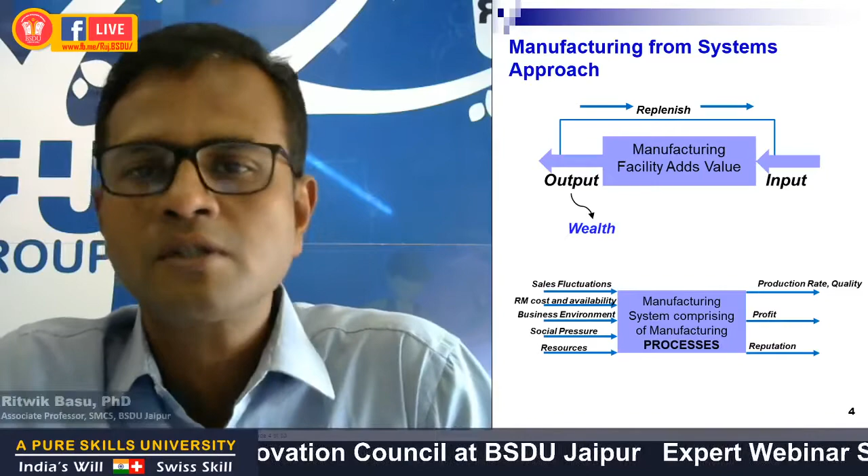Now, when we talk about manufacturing engineering from a systems approach, what is important is that a manufacturing facility exists, and that is really a value adder. As you could see in this figure, there is a manufacturing facility that is adding value to an input material, which in this case could be a raw material that otherwise has no value. But once the value is added, the output generates a lot of wealth, because the output has some value coded in it.

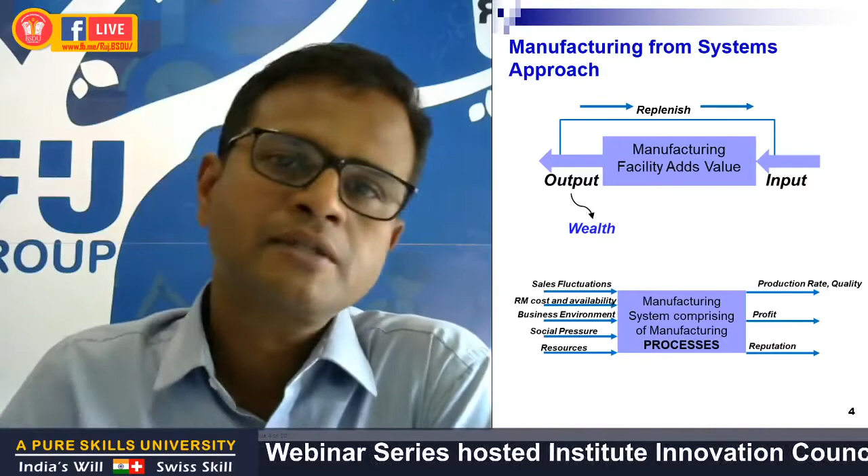Therefore, it is important to plan the facility in a manner so that the value can be added. And if the value can be added in the right manner, then the product can be positioned in the right manner. That is the reason why a manufacturing facility exists. So if I take a manufacturing system that has a manufacturing facility, it really comprises at the heart a set of manufacturing processes that is the key to wealth generation.

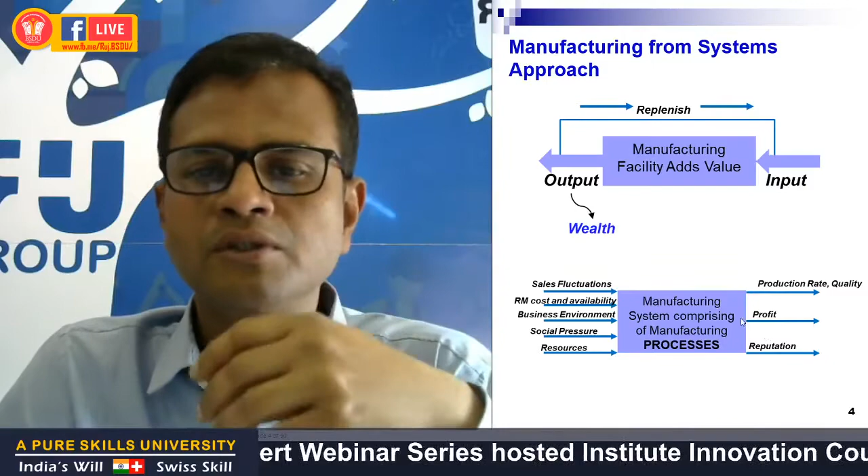On one side, there are various input parameters like sales fluctuations, raw material cost and availability, and the business environment, and on the other side, your production rate and quality, your profit and reputation to keep in business are all important for such a manufacturing system. But nevertheless, such a system will be balanced and work well if the key to it, the manufacturing processes, are well designed and well balanced. Therefore, the processes automatically become the bread and butter for such a manufacturing system.

Now, traditionally, manufacturing industries have brought metals to the forefront of technology, and since then they have remained there, forming the very foundation of our modern society. You could not have imagined a life in which the transportation and communication systems, the buildings, infrastructures, roadways, or even your safety and comfort devices are not part of your daily lives. And you see metals everywhere.

Of course, today many new material candidates have been seen complementing metals and alloys, and composites are one such example. But my feeling is that metals will still comprise the widest spectrum of applications, even for many more years from now.

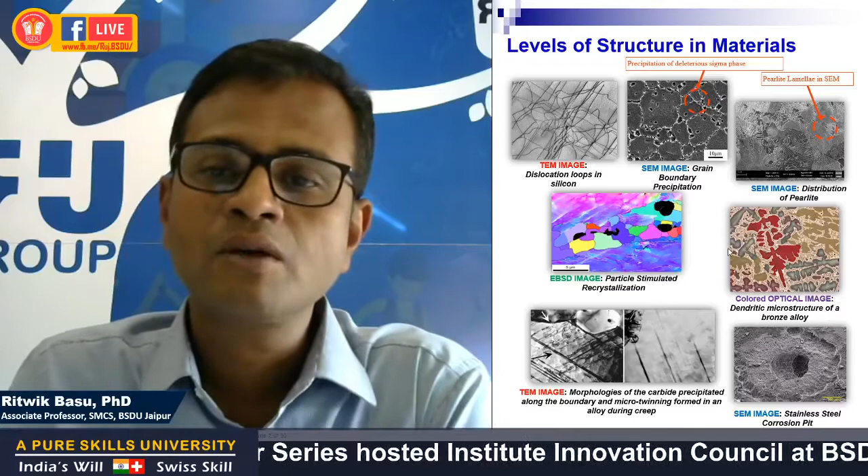This includes understanding the arrangement of dislocations and their interaction in cold-worked specimens, or looking into the distribution of precipitates or secondary phases along the grain boundaries, or understanding the phenomena of recrystallization or recovery during annealing, or looking into the crystallization pattern during solidification of metallic melt through high-end optical microscopy techniques.

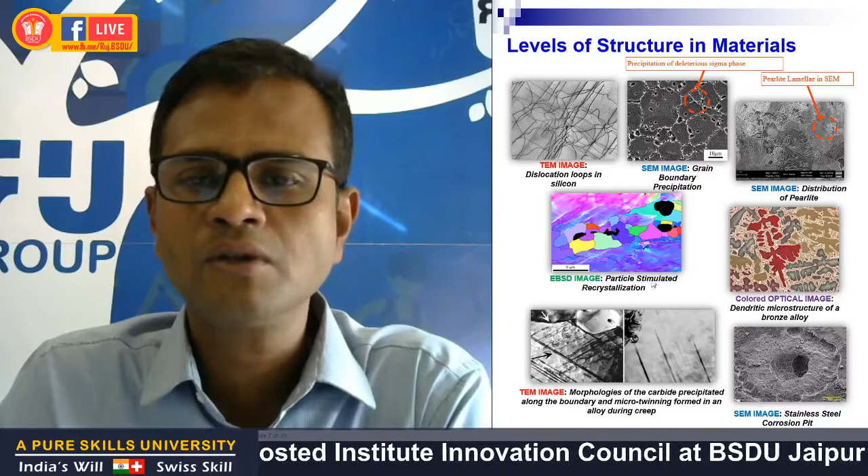These varieties of information could be inferred through techniques such as transmission electron microscopy, scanning electron microscopy, electron backscatter diffraction imaging, or even high-end optical or metallurgical microscopy.

My research is twofold. One, which I already discussed, is understanding the different metallurgical mechanisms associated with different engineering processes, and then inferring or relating the properties of the processed component from a microstructural standpoint. That forms one part, and the other part of my research is...

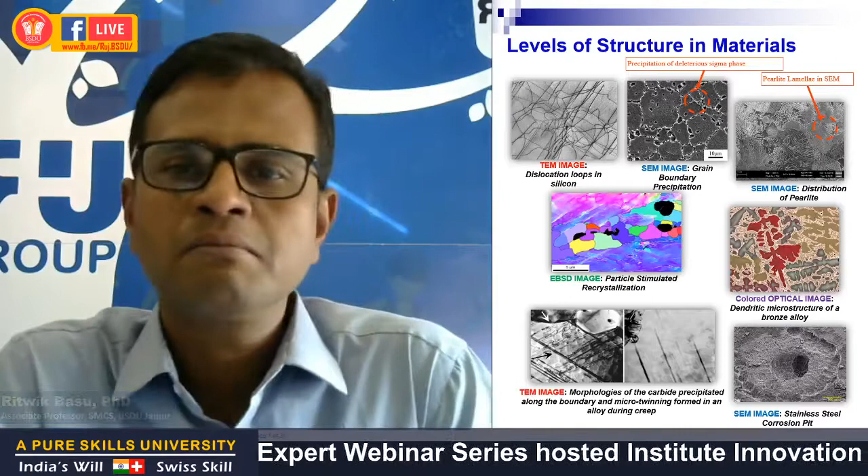...materials characterization or microstructural characterization through high-end scanning electron microscopy techniques, such as electron backscatter diffraction or energy dispersive spectroscopy. X-ray diffraction is another vertical I work on.

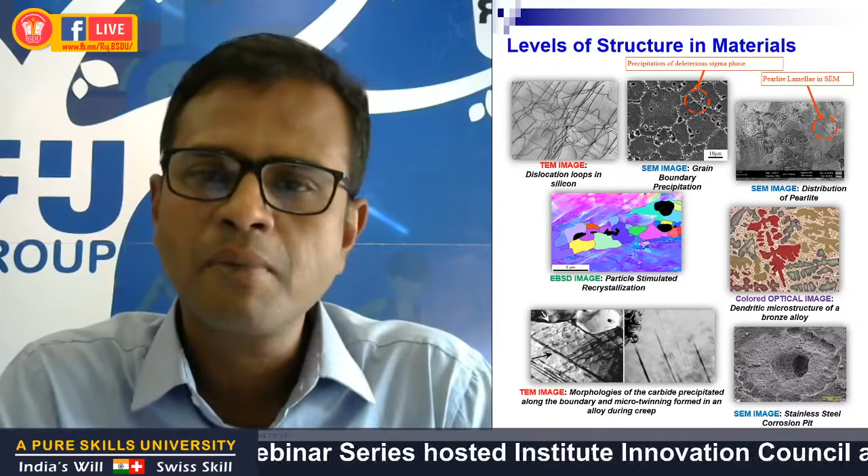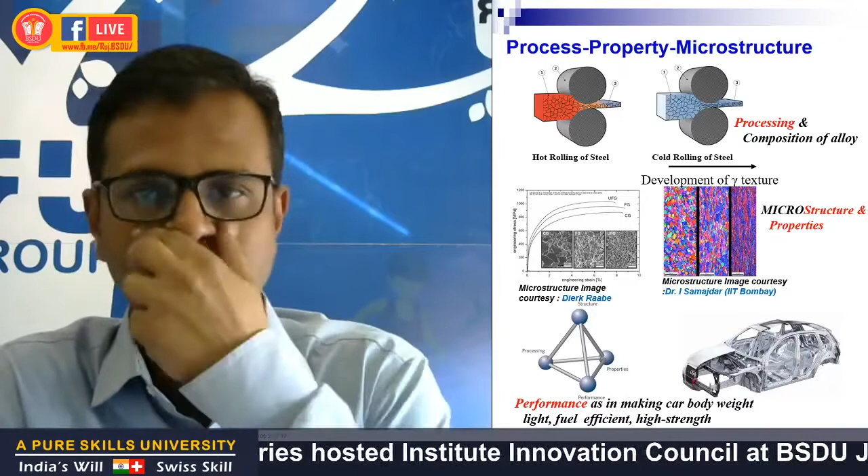Now, to give you a better illustration of this process-property-microstructure relationship in materials, we have this example of car body part manufacturing. As you could see, these car body parts are made up of sheet metals of steel, which are processed through hot rolling and then cold rolling, where a significant thickness reduction occurs.

The obvious question that arises is: the same thickness reduction could have been achieved through a much simpler process, such as sheet casting, which would have been more economic and time-saving. So why do we go for such complex deformation processes? Cold rolling or plastic deformation, apart from obtaining dimensional changes or shape deformation in material, also introduces certain interesting properties which other processes possibly do not offer.

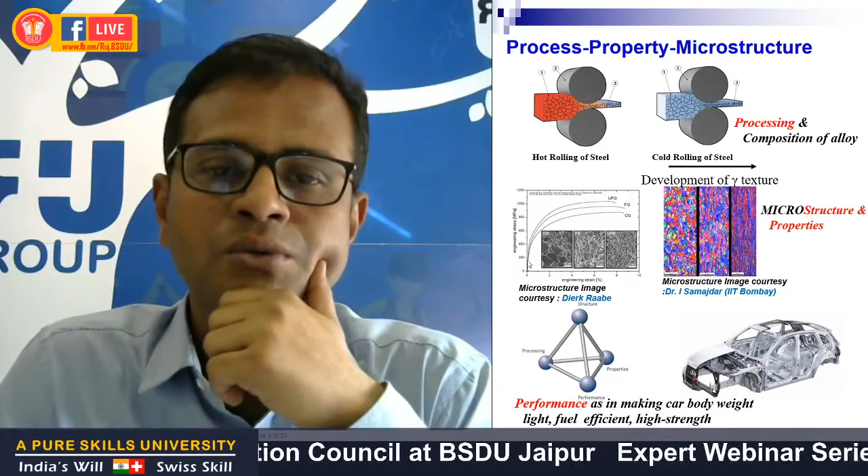Cold rolling or plastic deformation introduces grain refinement and texturing in the microstructure, and that is seen through a significant change in the mechanical properties or mechanical behavior of the materials. So the strength is seen to increase by several times, however the ductility drops.

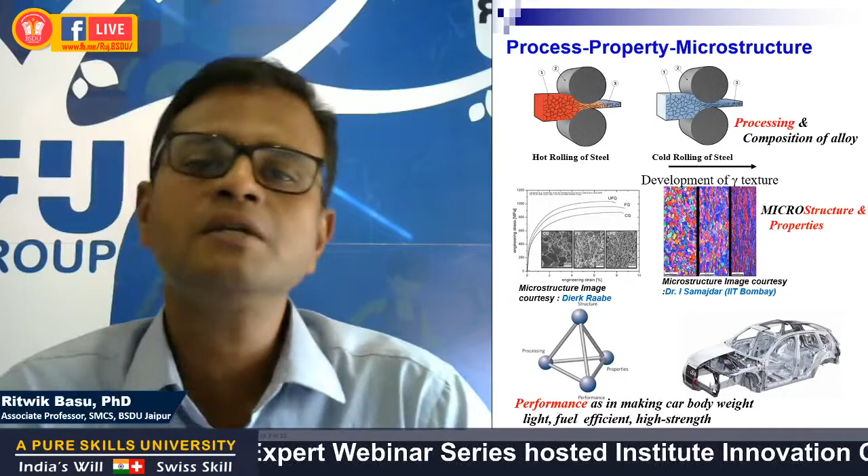Now the problem occurs when you try to give further deformation to these cold rolled sheets to obtain the nice contours and profiles, as you could see in this car body part. Difficulties arise because your sheets have been so much strain hardened that doing any kind of further deformation in subsequent processes may lead to cracking or failure in the sheets.

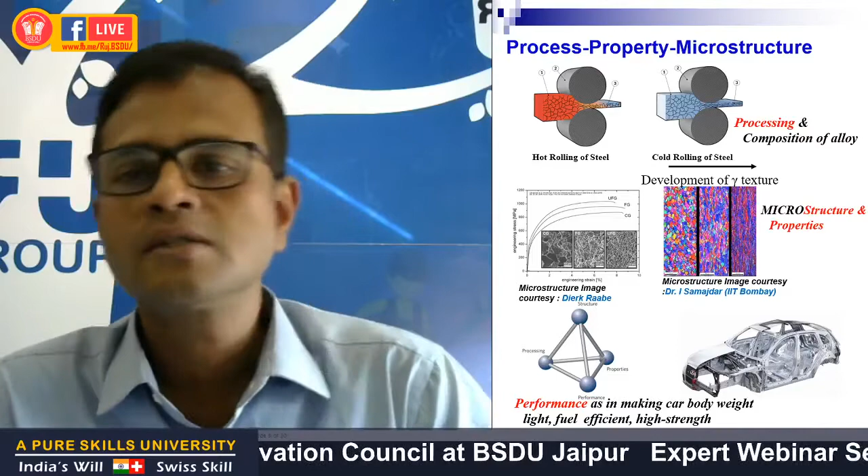So we have to think of alternative mechanisms of softening these cold rolled sheets, and we adopt certain techniques such as heat treatment, such as annealing, which includes recovery or recrystallization, that makes the sheet softer so that it becomes easy for the next subsequent deformation processes.

Cold rolling, as I was discussing earlier, introduces significant grain refinement and texturing in the microstructure, resulting in high strain heterogeneity in the material. So the strength is seen to increase by several times, however the ductility drops. Interestingly, upon annealing, the grain refined microstructure is retained together with a nice distribution of fine equiaxed ferritic grains. The strain induced largely during cold deformation is also relaxed during annealing, making the sheets softer, so ductility again increases. However, the strength drop is not so significant.

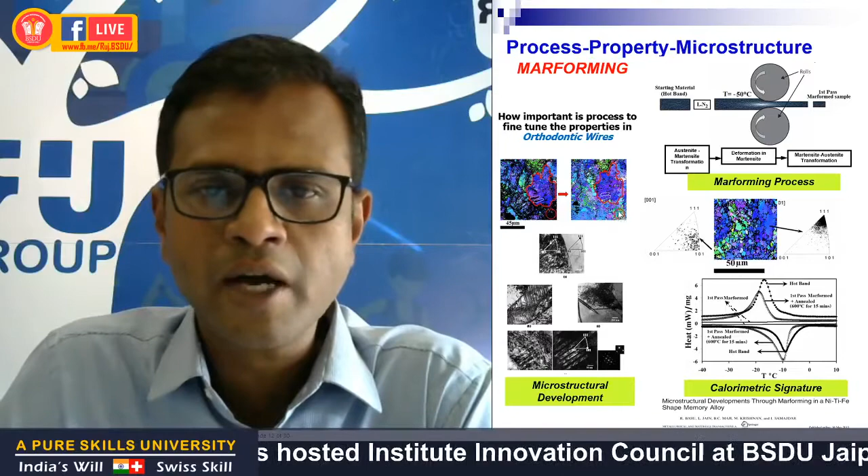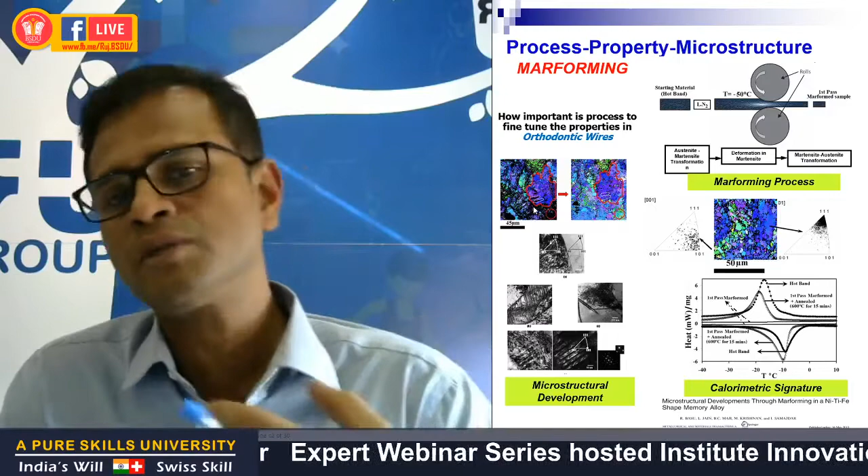So marforming without annealing shows no phase transformation. However, slight annealing could bring back the transformation process, seen through this pair of peaks in the calorimetric plot. The transformation here refers to the transformation from the high temperature state to the low temperature state and the reversal of phase transformation. So marforming without annealing introduces significant strain heterogeneity, seen through dense dislocation blocks or walls, that act as obstacles for the phase boundaries to transform during the forward and reverse transformation.

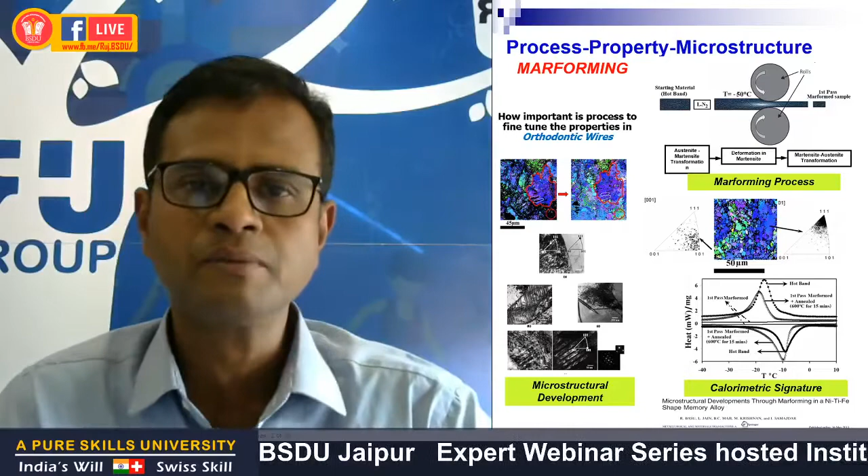The ease of phase transformation actually depends on the extent of annealing, the annealing time and temperature. However, there are other factors too — the mode of deformation and the level of deformation — that can also significantly alter the microstructure, which in turn controls the phase transformation characteristics in these materials.

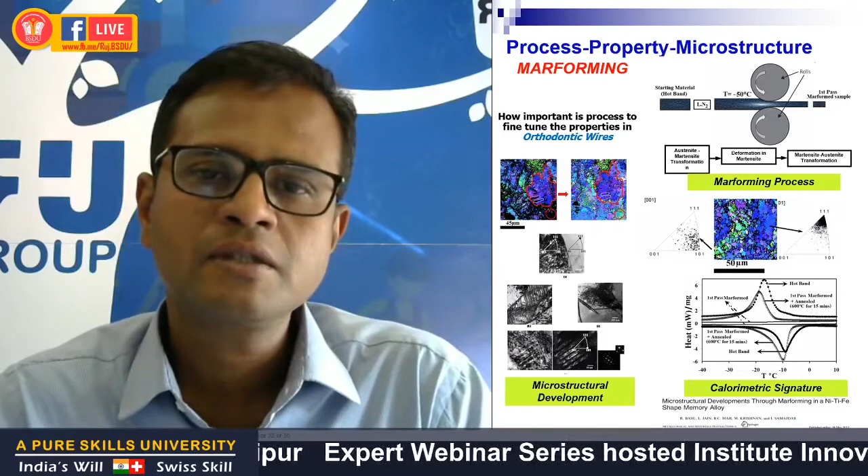So this was work that I carried out during my PhD research, and it was one of the interesting parts of my PhD thesis.

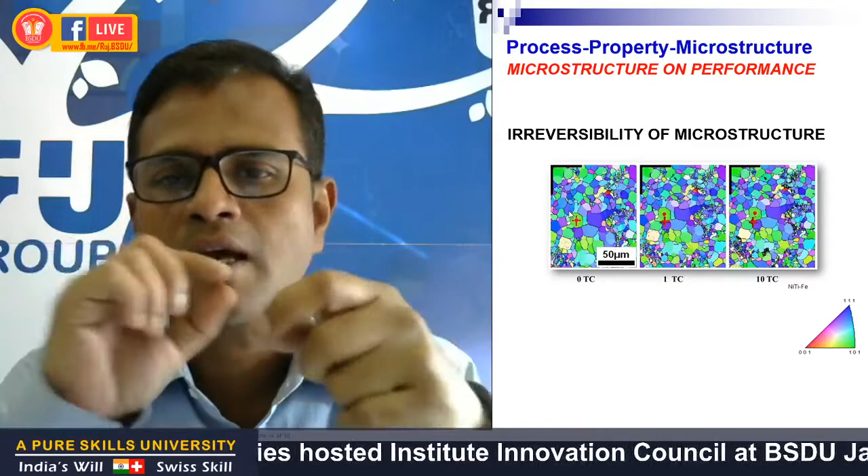After a few thermal cycles, shown here for the first and tenth for convenience, we see that after a certain number of cycles there has been some shrinkage in grains. Some grains have bulged, leading to significant displacement of the dot. The inverted L and crosshair can be assumed fixed to a reference, while the dot is movable. So there is a clear signature of microstructural irreversibility.

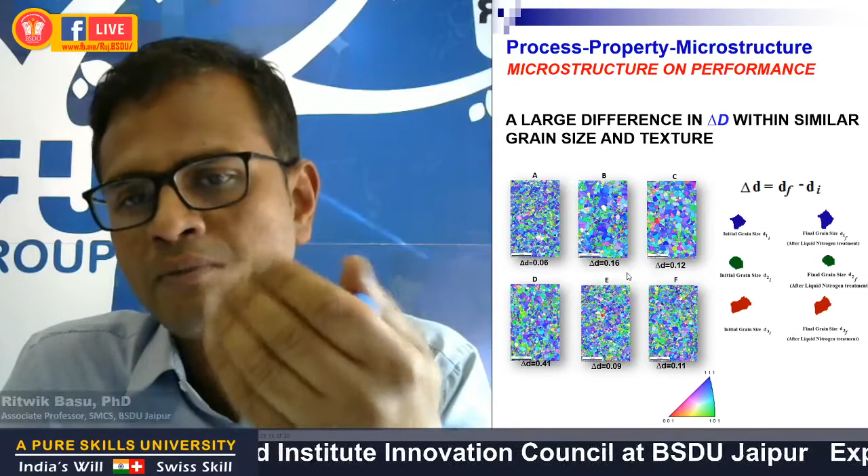We generated several different microstructures through the marforming route, followed by intermediate and final annealing treatments, then subjected each sample to one thermal cycle. The microstructures, though different, showed textures that were not significantly different. But what is more importantly different is the irreversible strain, or non-recoverable strain, varying from the lowest of 0.06 in sample A to the highest of 0.41 in sample D.

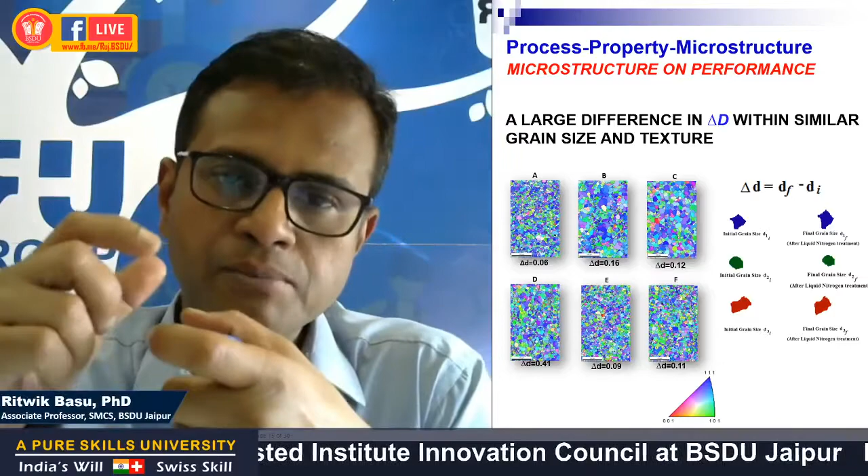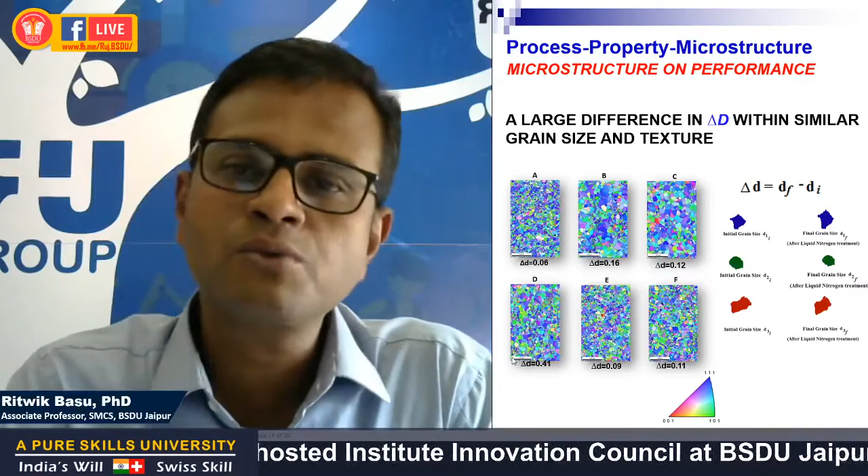The question is, why should sample D exhibit such an aberrant value? Sample D is the bad guy here—it shows the highest irreversible strain, which is not a preferred microstructure. To answer this, we had to look very carefully into the microstructures of all 6 different samples. What we found was that although all these microstructures more or less resembled each other...

A careful look into the microstructure showed that all these microstructures had a distribution of fine grains. However, sample D showed the largest clustering of fine grains. So the answer to why sample D shows such an aberrant value lies here—it is largely because of the fine grain clustering.

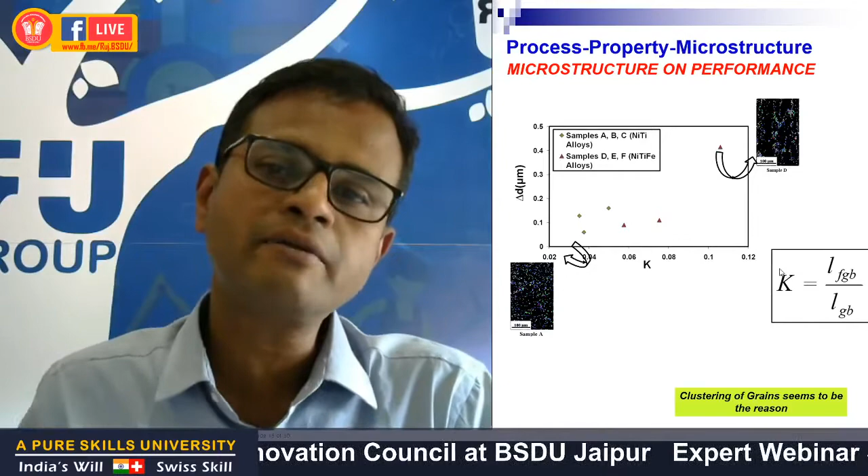We found a parameter K that defines the fine grain clustering as a microstructural quantity, defined as the ratio of the length of fine grain boundaries to the total grain boundary length in the microstructure. With increased clustering of fine grains, the effective fine grain boundary length between the fine grains increases, increasing the value of K. The plot of delta D versus K shows a nice correlation, with sample D exhibiting the highest K value.

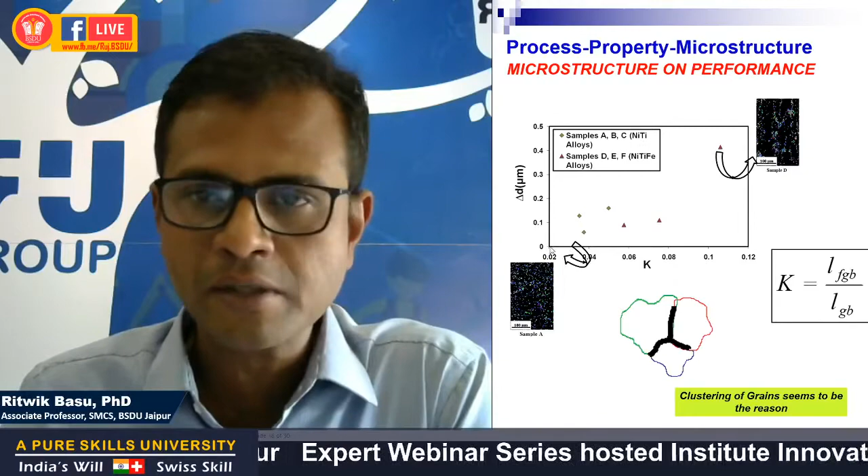So the first conclusion from this study was that the irreversible strain, or non-recoverable strain, indexed with this quantity called delta D, is purely a function of the clustering of fine grains.

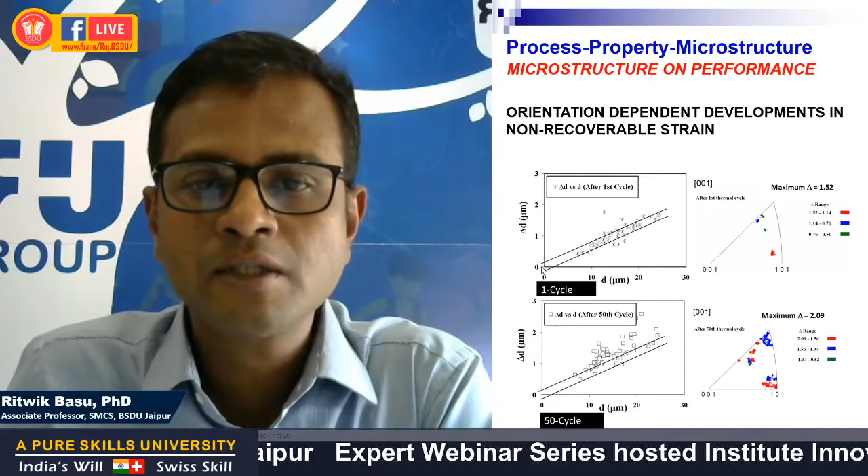We chose sample D and subjected it to a few more thermal cycles, going up to 50 thermal cycles. This quantity delta D, or the irreversible strain, as I stated earlier, is orientation sensitive, and this is brought out in this plot of delta D versus D. After the first thermal cycle, we saw these data points were nearly linear.

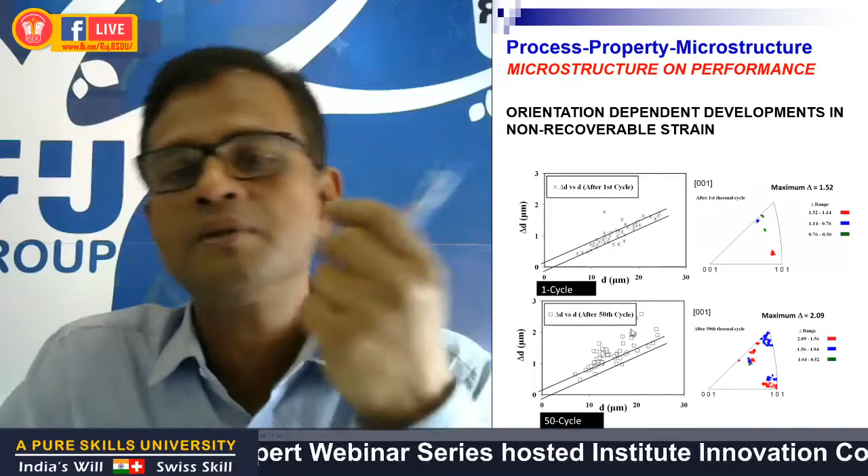We then fixed an upper and lower control limit with our best estimate in between, so that all data points lie between them. We found that with increased number of thermal cycles, these data points moved upward, and the grains exhibiting the highest delta D were sensitive to these orientations.

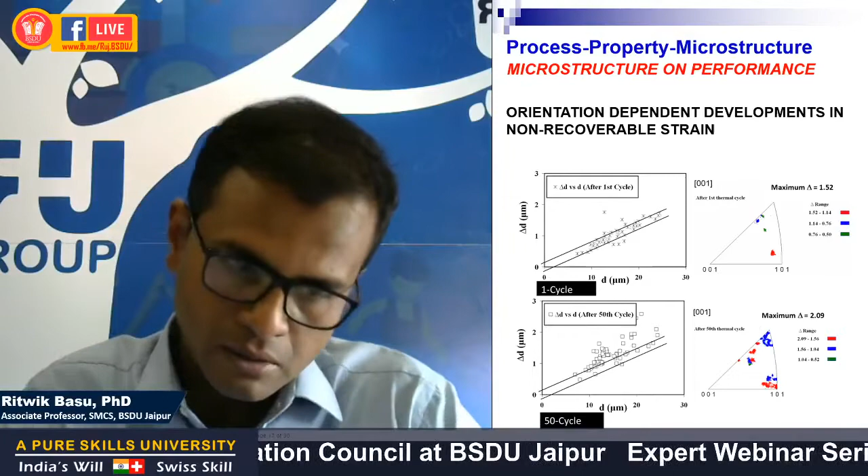So the second conclusion from this study was that the irreversible strain, or this quantity delta D, is very much orientation sensitive. We also found that the increase or decrease in the delta D average coincided with similar changes in the average misorientation and the fraction of retained martensite.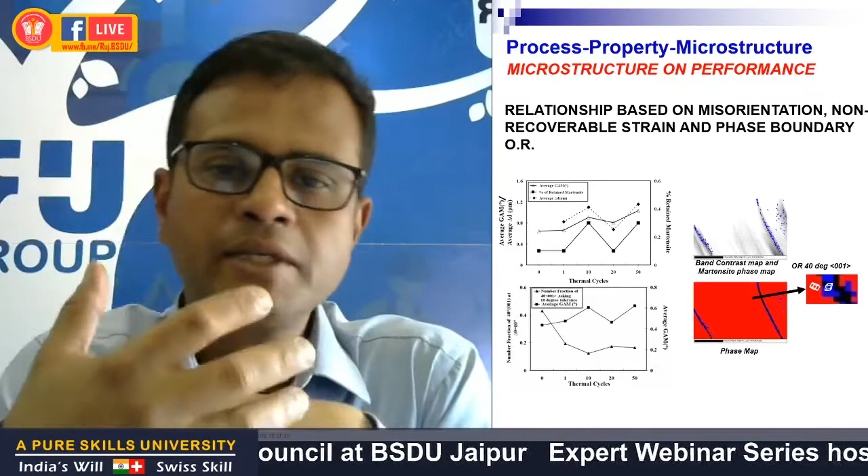So any deviation from the ideal orientation relationship or phase boundary relationship of 40 degrees 001 will not allow the martensite to return or revert back to austenite during the reverse transformation, and that will eventually lead to a higher fraction of martensite during successive thermal cycles.

So we found that with increased number of thermal cycles, the average misorientation increased, and that led to a corresponding drop in the number fraction of the 40 degree 001 phase boundaries.

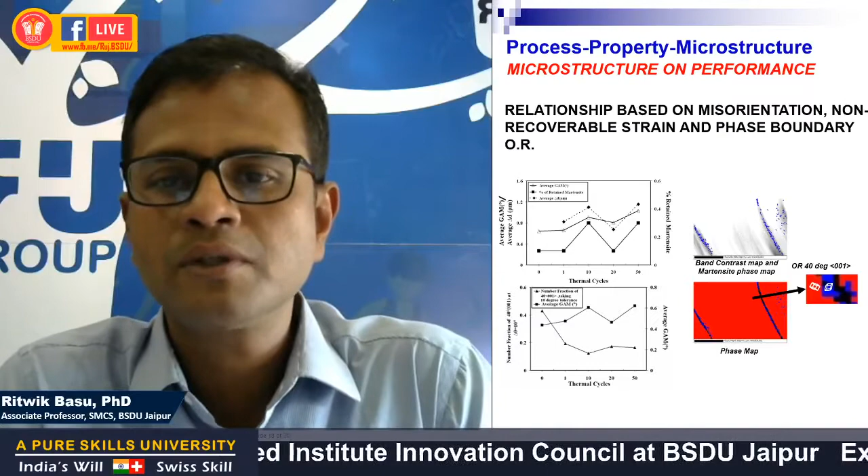So the final conclusion from this study was that the irreversible strain largely depends on the deviation from the exact phase boundary orientation relationship. Any deviation from the ideal orientation relationship will lead to an increase in the irreversible strain.

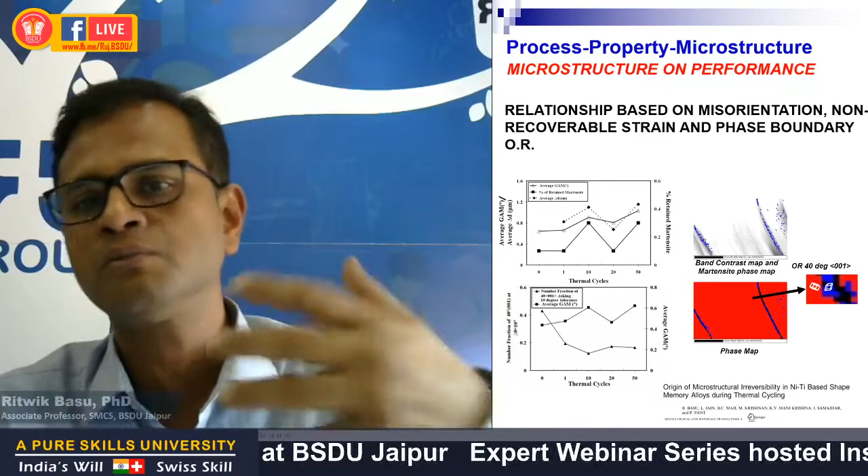So that was from my earlier research work on nickel titanium alloy systems. I must tell you that I have worked on this particular material candidate back during my PhD and postdoc research for almost 6 years. I am familiar with the processing, then analysis of the properties both at the microscopic and macro scale.

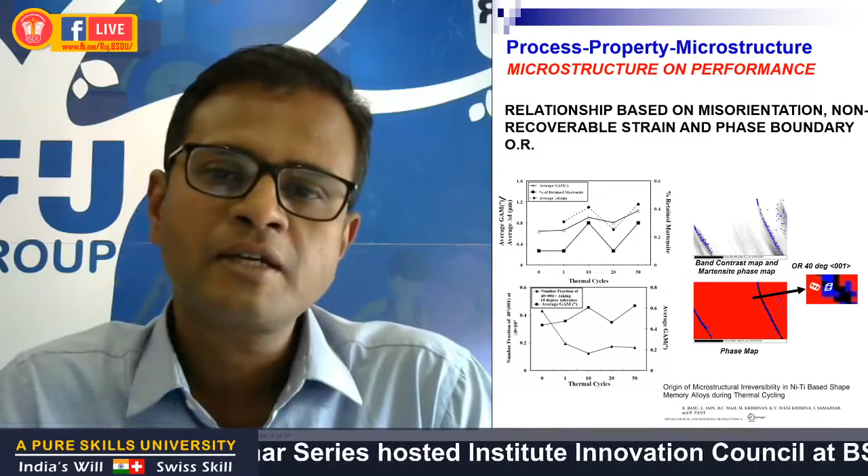But I must tell you that much of my research interest in recent years has focused on fusion welding and metal fabrication, all these years in my academic position, interpreting the problems that normally occur during fusion welding and evaluating the weld metal performance from a microstructural standpoint.

Now, the way I work with my students is that I first identify a problem that is of more practical interest to industry, and then see the feasibility of conducting or simulating these processes at a lab scale with my students. Only then do I take on a research problem.

So I have a few good collaborators from different industries, mostly in the metal fabrication segment, those who help me in designing particular students' research problems for projects, and that is our work with industries.

So we have previously worked on dissimilar welding of steels and aluminum alloys, of which steels looks to be quite interesting. Now, dissimilar welding is an emerging area in welding science and technology, and many applications in aerospace, marine, automotive, or even the power sectors have been largely benefited from dissimilar welding.

So this process has importance in applications where a combination of properties is desired to be present at different regions or locations within the same part of the component or structure. There are applications that may require, say, high thermal resistance in one region, while high corrosion resistance is needed in another part of the same component.

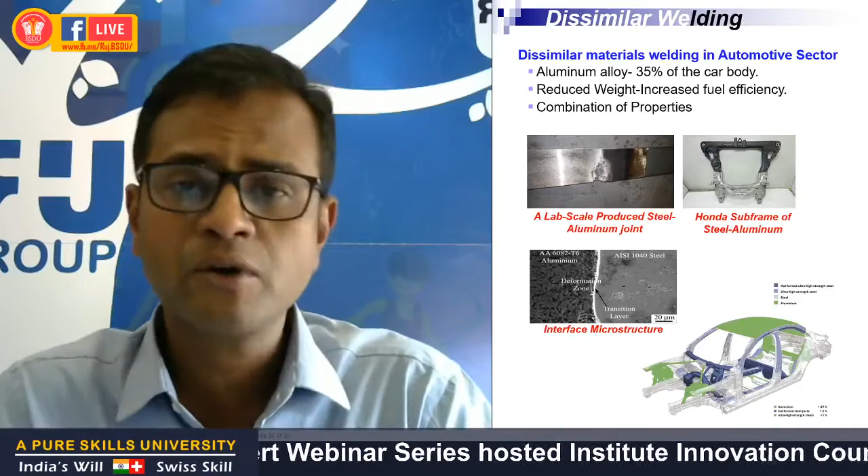There are also applications that may require high wear resistance or toughness in one region combined with high strength in another location. So dissimilar welding in steels is increasingly becoming common these days, especially in piping and structural welding.

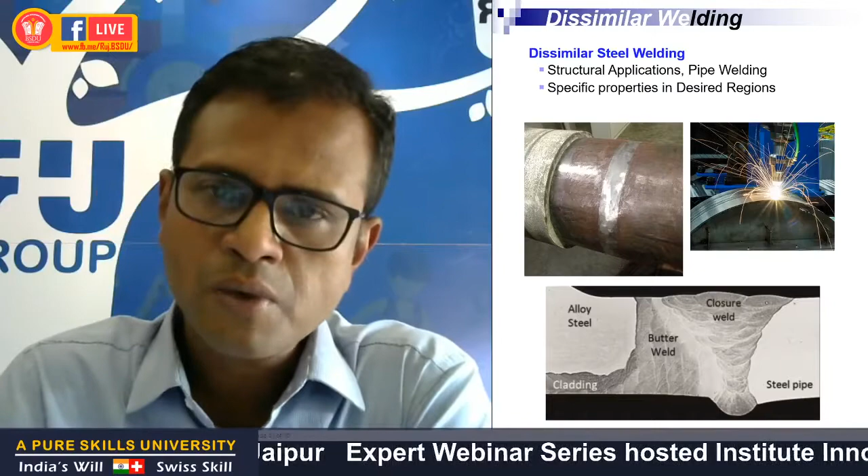So we have examined the dissimilar welded structures of steels, such as stainless steel welded to mild steel. We saw the different microstructures that were generated as a difference in the heat input, which also led to significant differences in the strength of the material.

So the microstructures were seen to vary from a large grain distribution of single phase gamma austenite to a fine grain distribution of mixed phases of gamma austenite and delta ferrite. Again, the austenite grain boundary fractions between these samples were notably different.

We found that for samples exhibiting two-phase microstructures, a particular orientation relationship between austenite and delta ferrite exists. However, their relative presence differed between the samples. So the strength of the welded joint was seen to be a clear function of the low-angle grain boundary fraction.

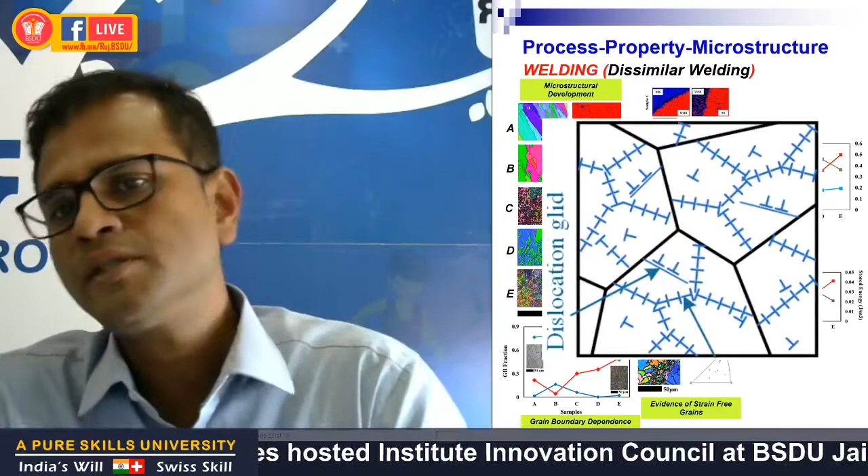So low-angle grain boundaries exhibit a discrete dislocation array inside a grain, while high angle grain boundaries primarily remain at the actual grain boundaries of the material in the microstructure scene.

So with an increase in the low angle grain boundaries, these dislocation walls are refined and finely spaced, therefore impeding the movement of other slip dislocations across the boundaries, leading to strengthening of the weld joint when stresses are applied.

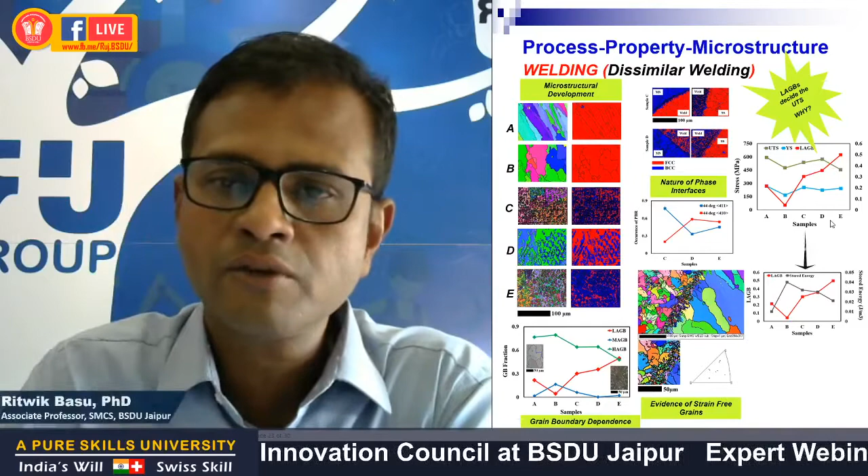So the decrease in strength and ductility of sample E, as can be seen here, with increase in the low angle grain boundary fractions, could be related to the lowering of the stored energy. And stored energy is actually the driving force that increases the mobility of dislocations, and that led to early fracture even at lower stresses for sample E.

So we found that the low angle grain boundary fraction correlates well with the stored energy estimated from the Read-Shockley equation, measured from the grain boundary misorientation criterion.

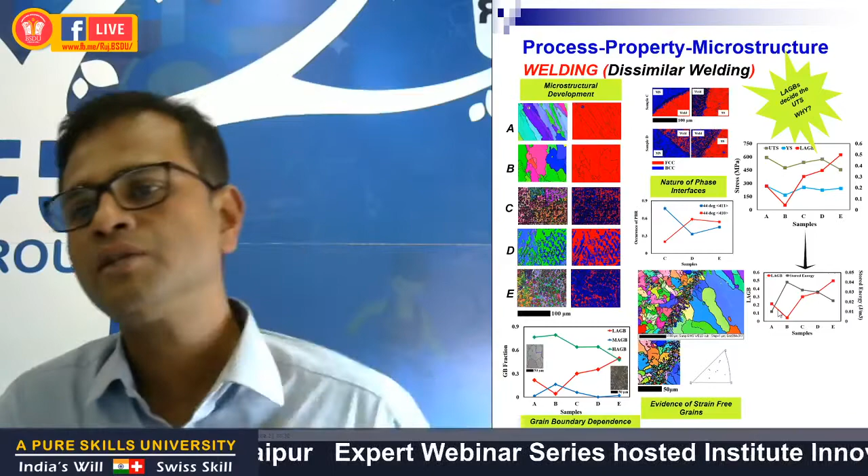We have also seen that with increase in the ferrite content, the impact energy in the samples reduced, especially for the samples that exhibited a two-phase microstructure. So overall, we have shown that a two-phase microstructure is indeed important for imparting a good combination of strength and toughness. So this was a work of mine.

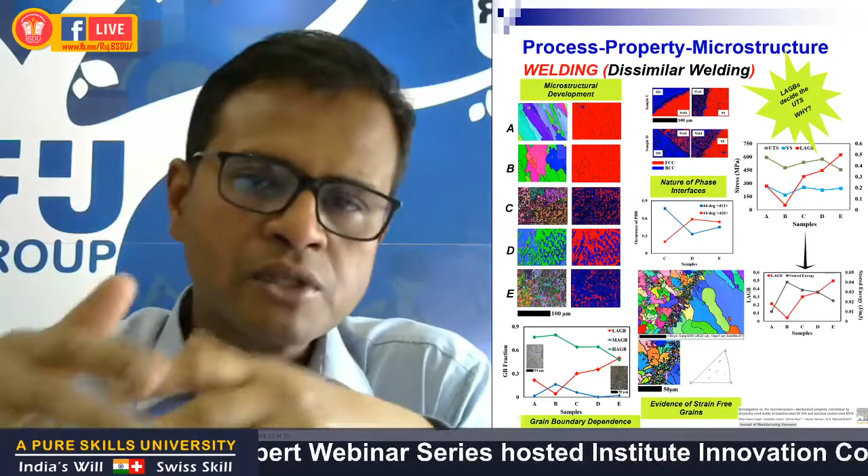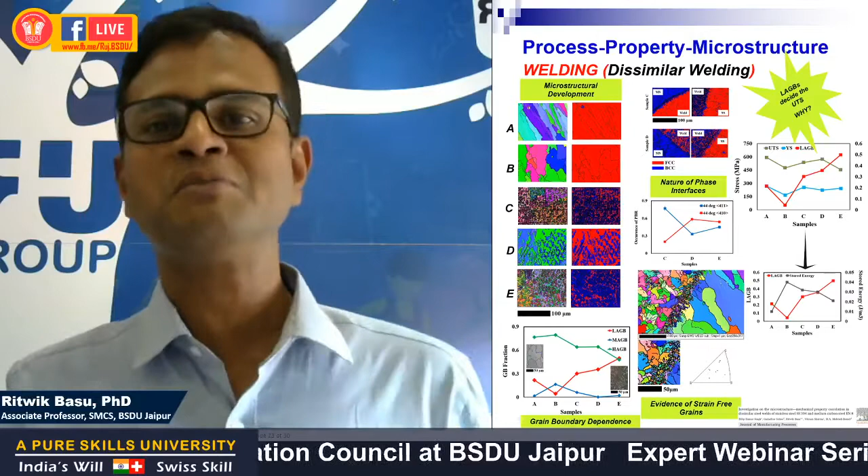So all that I'm going to present now is my MTech students' work, because as a faculty, you no more do your own research—it's after all your students' research. So these are all results from my students' research project. This got published in 2018 in the Journal of Manufacturing Processes.

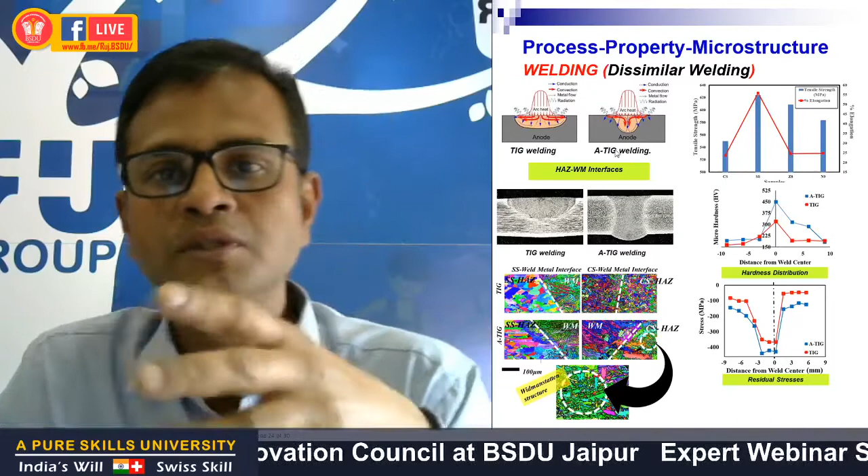Now, these differences in the microstructures, as I was discussing, not just depend on the process variables used, but also on changes brought about by changing the processes even under identical conditions. So changing the process, for instance from tungsten inert gas welding to activated tungsten inert gas welding, can alter the microstructure significantly, and that can also have a strong influence on the properties of the material. And that is largely because of differences in the cooling rate, which plays a vital role in determining the final microstructure of the weldment.

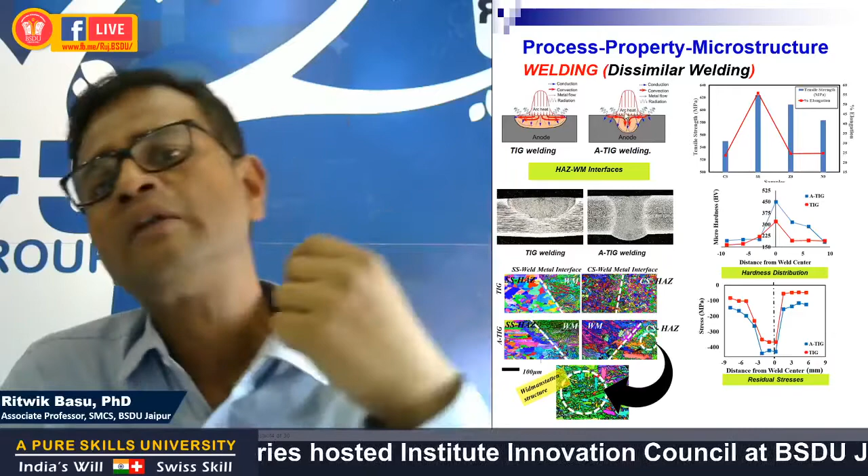So in the case of activated TIG welding, or A-TIG welding, an activated flux is applied on the material to be welded, and that leads to constriction of the arc, leading to increased current density at the anode root, and also increases the arc forces on the weldment. So when welding stainless steel or any other steel through A-TIG welding, the cooling rates are significantly increased.

It is actually that the heat affected zone of the carbon steel side in the case of TIG welding shows a more fine equiaxed ferritic microstructure, while the heat affected zone of the carbon steel side for the A-TIG welded specimen shows a Widmanstätten ferritic structure that introduces significant grain coarsening.

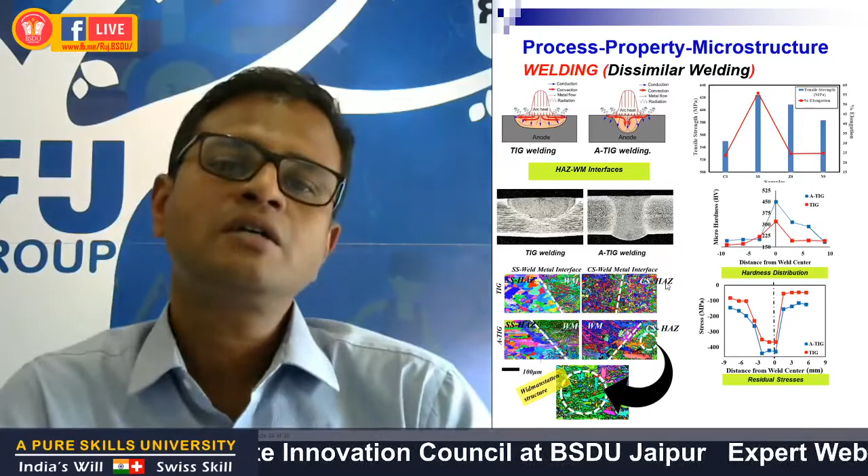So the difference seen between the TIG and A-TIG welded specimens could be because the heat affected zone underwent a two-phase transformation during cooling: a high temperature transformation from delta ferrite to gamma austenite, and then gamma austenite to alpha ferrite in the second stage. Now during welding, when all other material properties are uniform, the cooling rate depends on the amount of molten metal available and also the availability of a heat sink to conduct the heat away from the melt.

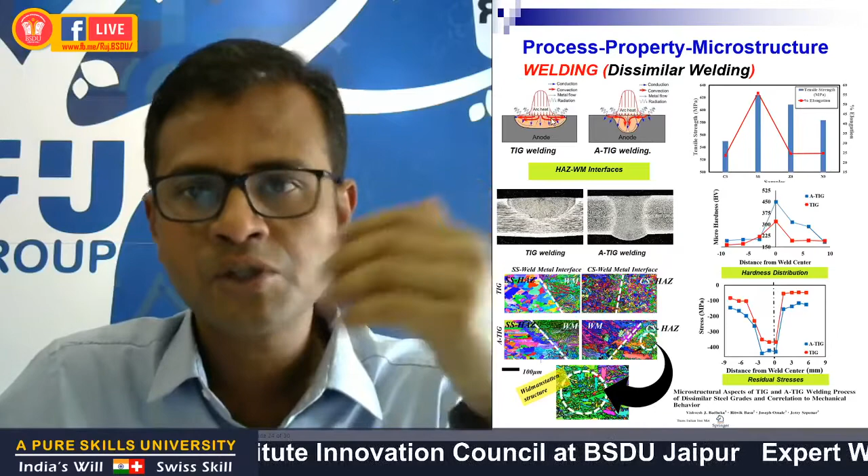In the case of TIG welding, the weld pool is much shallower and the arc energy heats up the weld region and surrounding region to a much higher extent. Therefore, the nuclei of the austenite grains formed grow by advancement of the planar interface for a longer duration of time. While in the case of A-TIG welding, the weld pool is much deeper and narrower, and the arc energy does not heat up the surrounding regions to the same extent as in TIG welding, and therefore it can cool down much faster.

So this is partly speculative as to why these differences in microstructures could be observed through TIG and A-TIG welding.

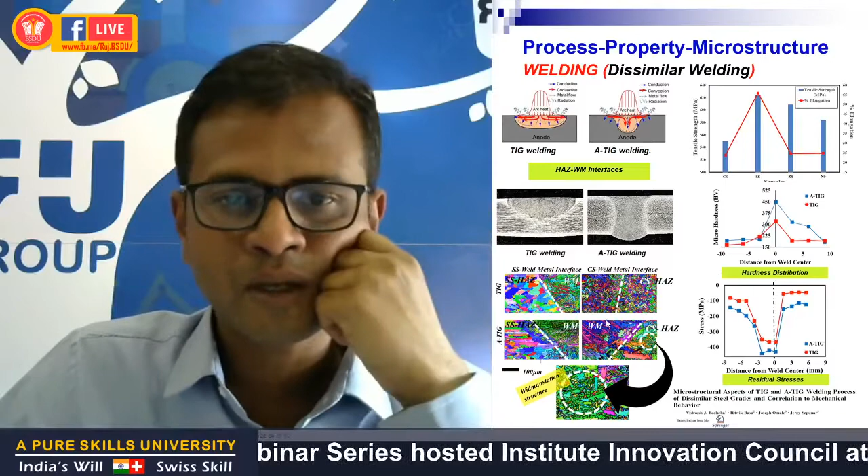Again, the relatively high strength of the A-TIG welded specimen could be attributed to the higher in-grain misorientation in the microstructure, and also to the formation of the Widmanstätten structure that introduces significant grain refinement.

Also, the measured hardness profile and residual stress bring out some interesting observations. Although it is known that the maxima in hardness corresponds to the minima of compressive residual stress, in our samples we did not see a direct correlation between hardness and compressive residual stress.

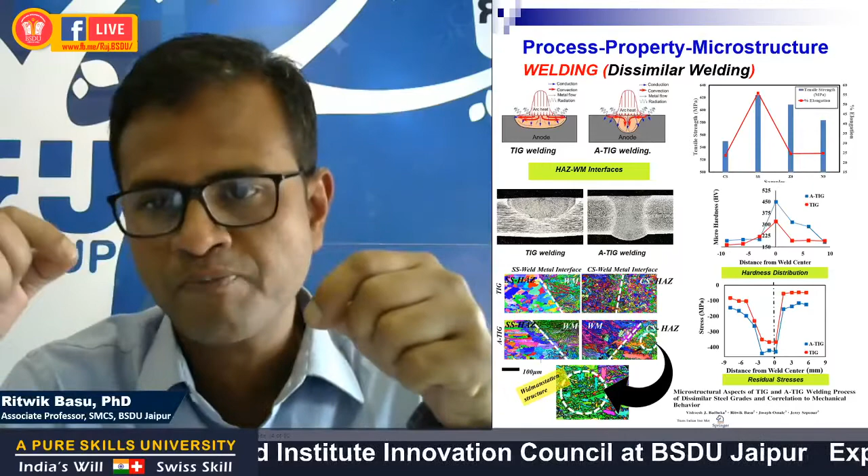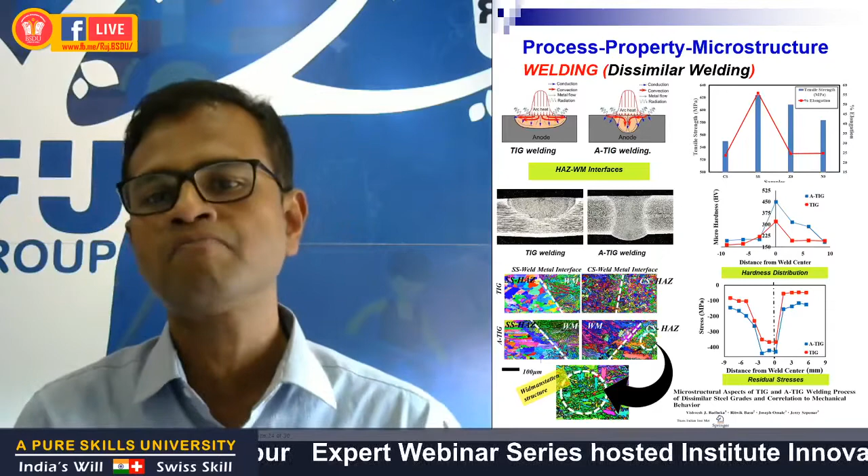So the residual stress measured along the weld surface exhibited a well-like profile, slightly shifted toward the stainless steel side. Why this shift occurs is not clearly understood, but it is speculated that thermal mismatch strains between the stainless steel side, which had an FCC structure, and the weldment, which had a BCC structure, could possibly be responsible for the shift in the well-like profile.

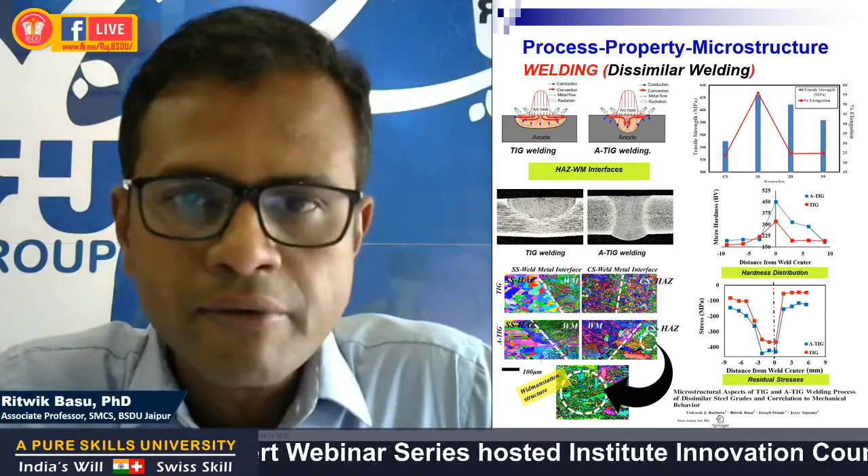So this was another work done by my students in collaboration with my Canadian supervisor, which got published in the Transactions of the Indian Institute of Metals back in 2017.

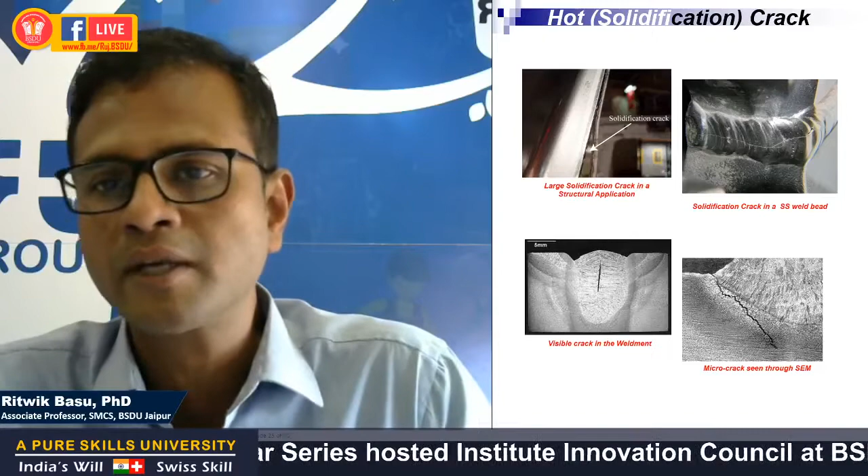Now, another problem that industries face when welding stainless steel structures is solidification cracking, or what we call hot cracking. It is actually the formation process of shrinkage cracks during solidification of the weldment or weld metal.

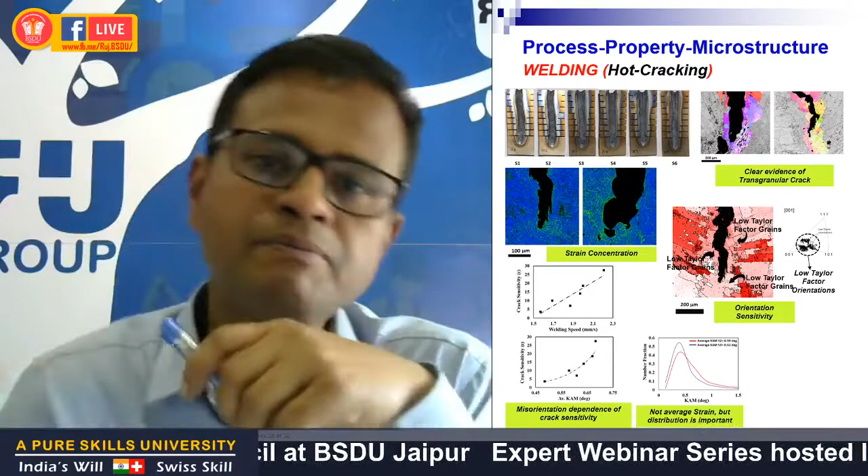So we have done a detailed microstructural analysis to investigate the reasons for solidification cracking in stainless steel welds. We tried to simulate these hot cracks in lab-scale samples at different welding speeds. The morphologies of the cracks were quite different between the samples, and these differences were also seen in the microstructures of the weld regions around the crack areas. The EBSD mapping revealed that these cracks were mostly transgranular in nature.

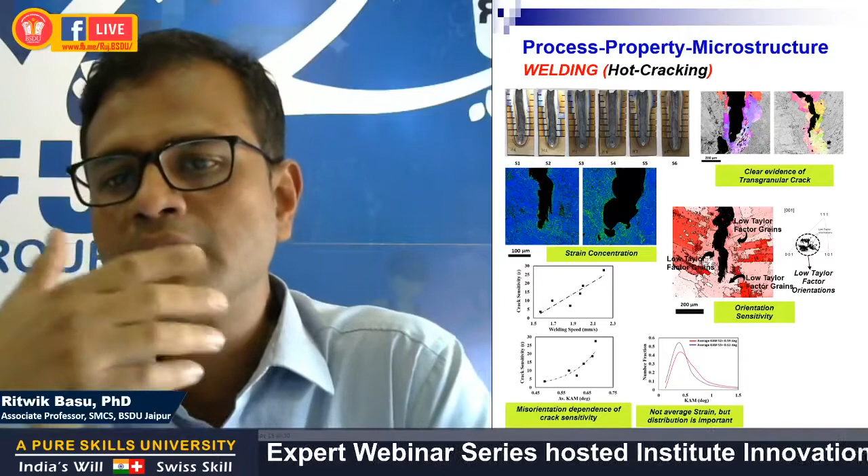So the cracks were seen to propagate mostly through the low Taylor factor grains, the softer grains that had orientation suitable for slip activation. Crack propagation was mainly assisted by deformation slip around the plastic zone of the crack tip.

It was also brought out that a higher strain concentration was seen to be associated around the cracks with increasing propensity, verified through the local misorientation distribution that shows significant heterogeneity between samples. These local misorientation points, shown in green, were accumulated more at the subgrain boundaries, primarily the low angle grain boundaries.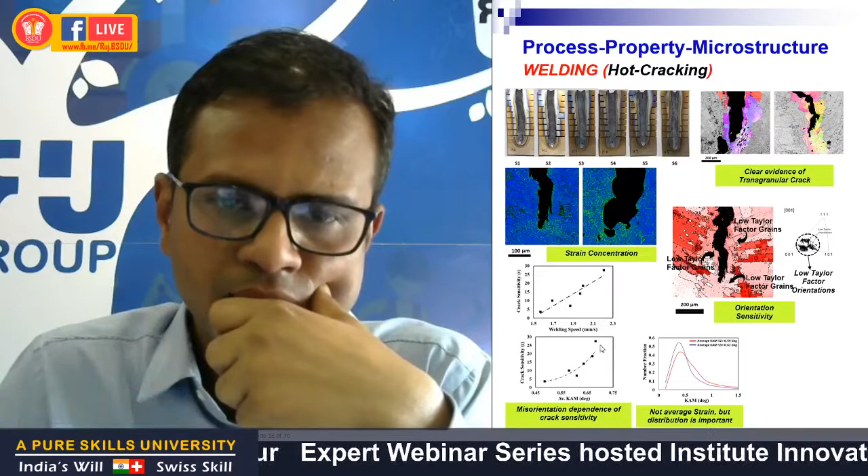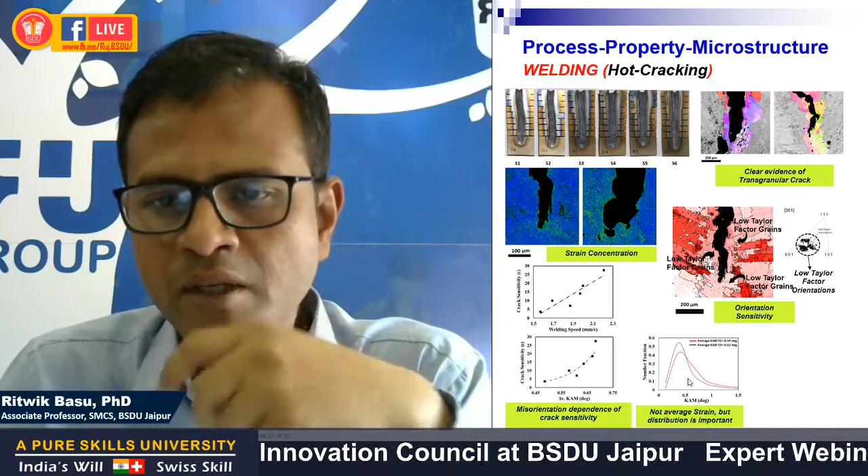We also found that this crack sensitivity depends not just on the average misorientation of the weldment microstructure, but also on the distribution of the misorientation in the microstructure. That means how your defects or dislocations are distributed in the microstructure also decides the crack sensitivity in these materials.

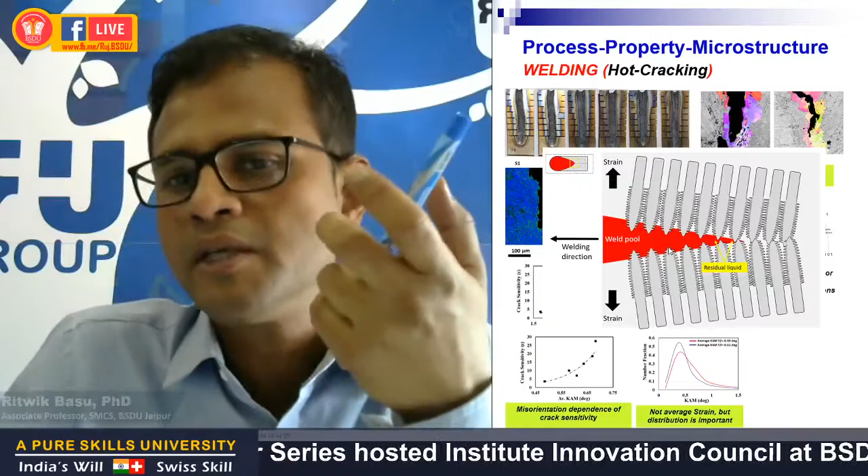The possible reason for cracking could arise due to thermal mismatch strains that develop during solidification of the residual liquid trapped between the interdendritic regions. These cracks are usually seen to accumulate more at higher welding speeds. However, for our samples, those that exhibited a low tendency to cracking possibly constituted a less stable liquid film. With increase in welding speed, the tendency towards forming a stable liquid film was more likely, which increased the strain concentration around the liquid, leading to higher cracking tendency.

This is a work of another MTech student of mine, which is under communication.

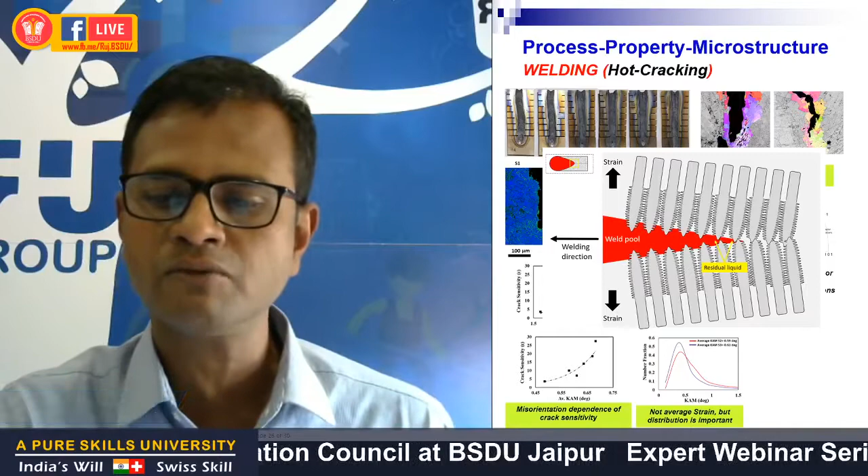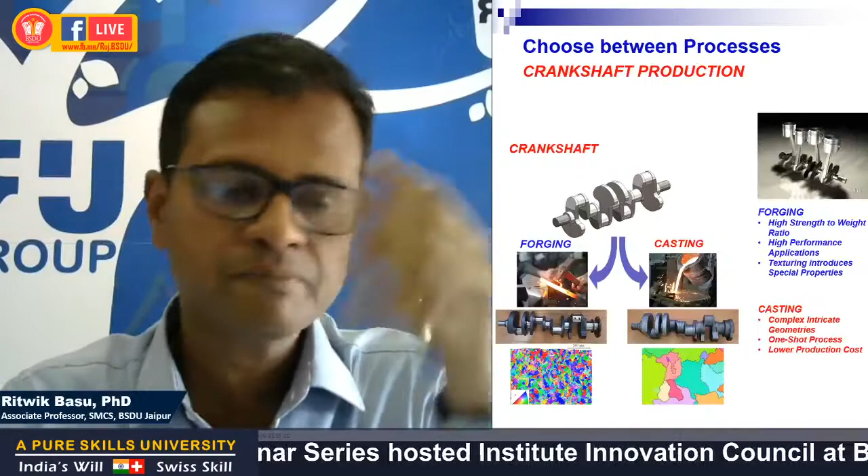I must also tell you that selection of processes based on microstructure criterion is also important for many applications. As in the case of crankshaft production, a crankshaft can be produced through two different processes - forging and casting. The preferred process is forging.

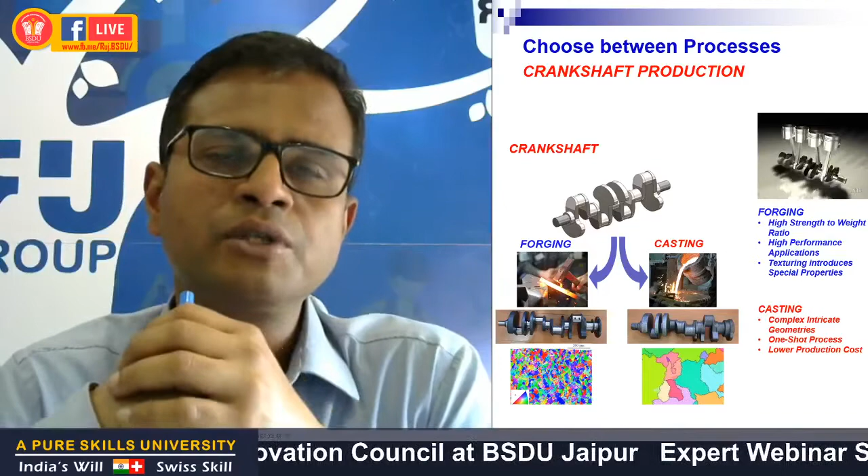However, forged crankshafts are much superior to cast crankshafts used in automotive applications. Usually, forged crankshafts are used for high-strength, heavy-duty applications, whereas cast crankshafts are usually used for lightweight applications where there are chances of less impact or fatigue.

But what brings a difference in properties between the cast and forged microstructure is again understood from a microstructural perspective. Forged microstructure exhibits texturing as well as fine distribution of grains that leads to grain boundary strengthening and partly anisotropy, making it superior for many high strength applications.

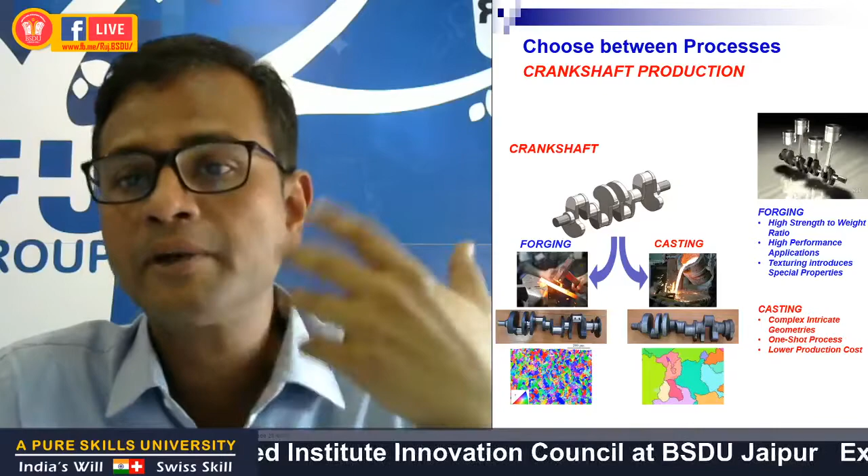Whereas cast crankshafts are good for applications that require high abrasion resistance or wear resistance. So when choosing between two or more available processes, you have to make a judicious choice from a microstructural standpoint, and the crankshaft example is the best example to showcase this.

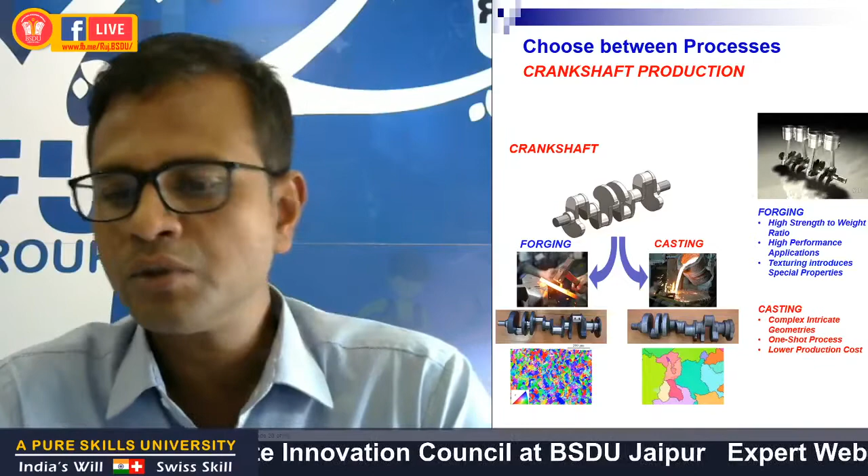So with that, I'd like to come to a conclusion of this presentation. All that you could possibly understand is that the properties of the material become an important criterion both during processing as well as in service or use application, and these properties are largely governed or dictated by the microstructural mechanisms that occur during a process, or the end microstructure attained after processing.

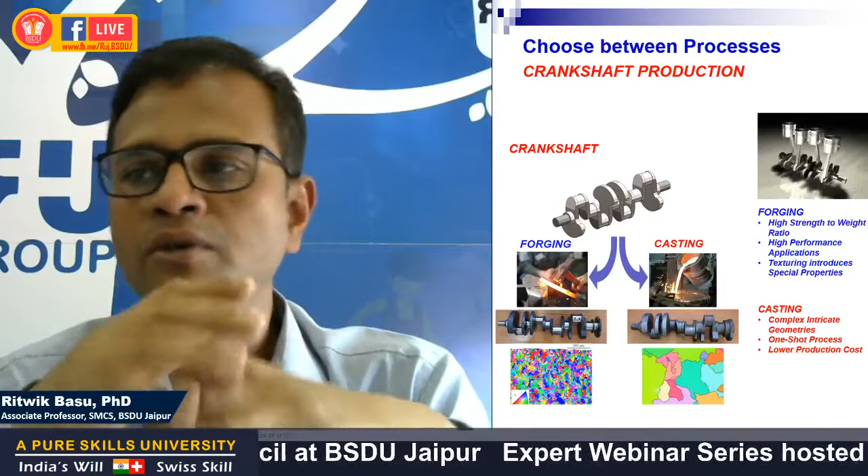This is a subject which has much potential if you are trying to explore problems specific to manufacturing. Though mechanical engineers are not very handy with microstructural analysis, this is not a very difficult subject to understand, though it largely lies within the scope of metallurgical engineering.

But at times, as I was discussing earlier, persons involved in manufacturing have to really understand the criticalities of processing as well as applications, and a microstructural standpoint understanding is indeed important.

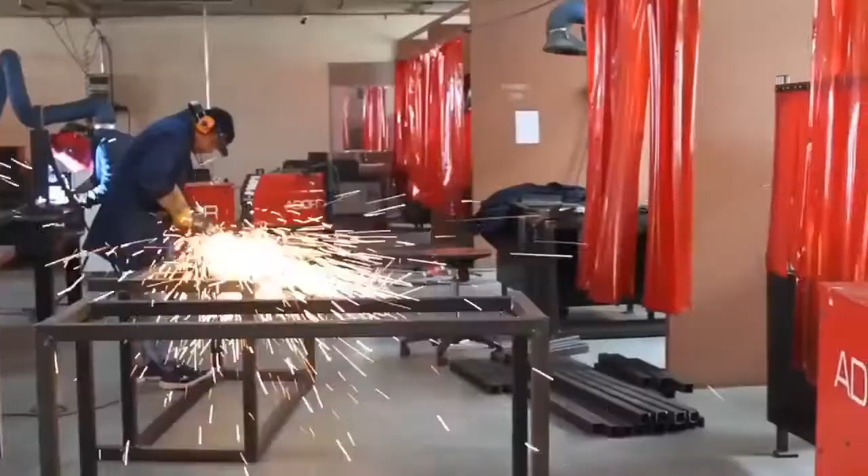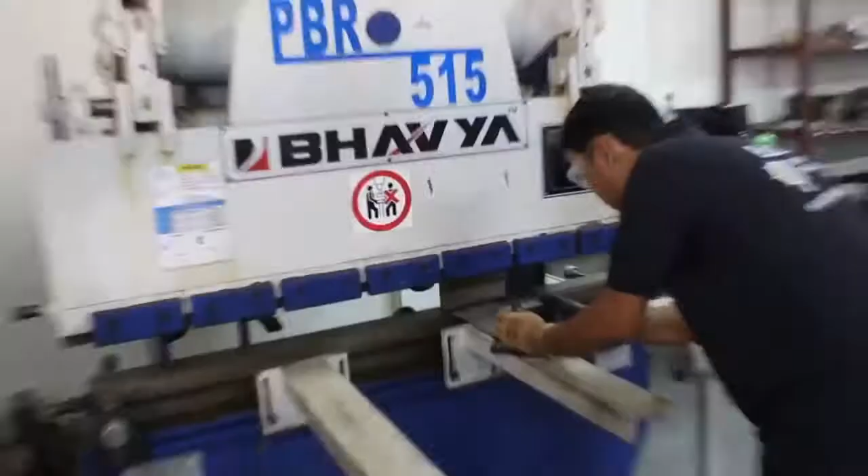As I was telling you earlier, I was at a Swiss-funded university, and I had, as the principal of my school, the School of Metal Construction Skills, that largely deals with metal fabrication, welding, sheet metal production, and all these activities. We have a large range of welding machines, mostly arc welding machines, all imported. We have laser cutters, plasma cutting machines, sheet bending machines or press brakes. We also have very high quality shearing machines, saws, and we have recently procured a cold forging press and a deep drawing press.